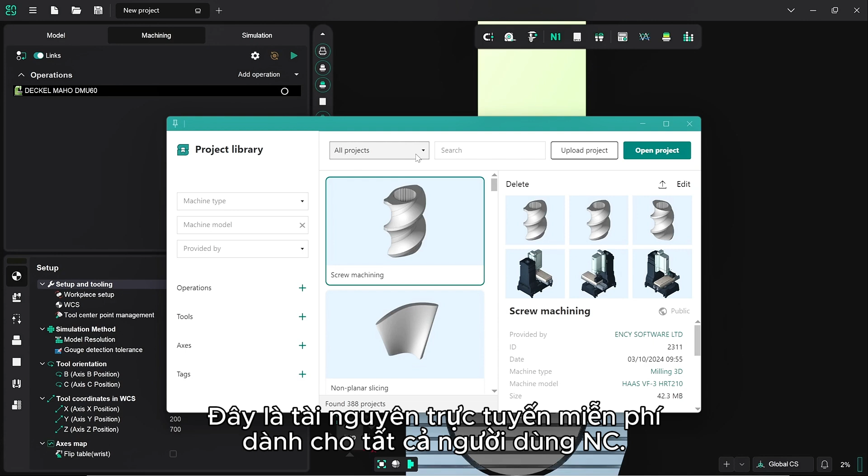So to access this, we go to the ENCY project library, which is under the open icon. We hover our mouse over it and then click on project library. This is a free online resource available to all ENCY users, and it contains nearly 400 projects which are covering a variety of different machine types and machining operations.

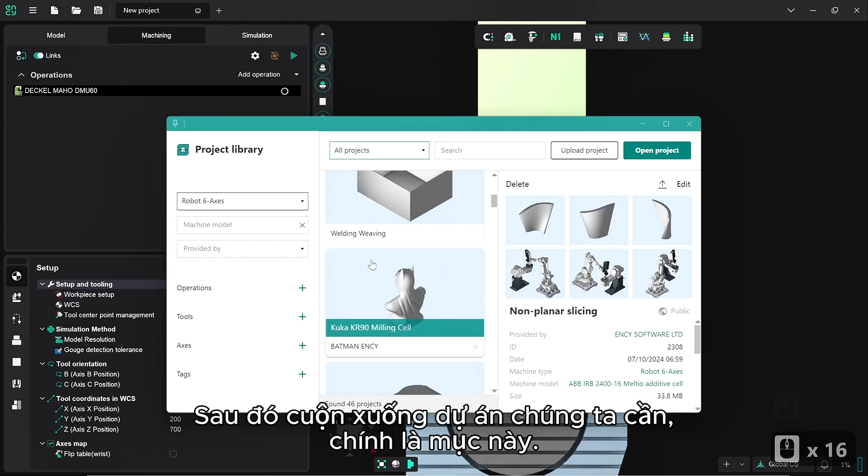However, since there's such a significant number here, we're going to close the field down slightly by clicking on machine type and choosing robot 6 axes, and then scrolling down to the project that we want, which is this one. And it lists here how it comes with a KR90 milling cell configuration as well. All of these projects will have the cell definitions or machine definitions set up for them already.

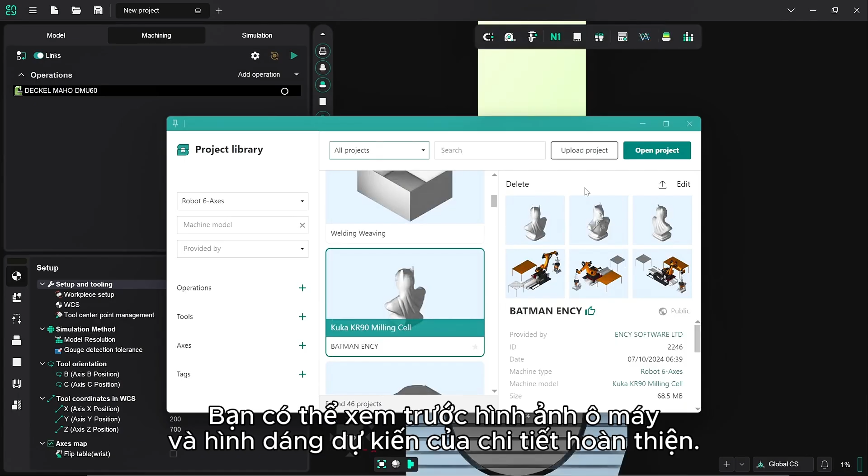So we can see here a nice preview picture of the cell and a preview picture of what the finished part is expected to look like. So we click on Open Project and it will prepare and download the file for us. Now that that's downloaded, we can close the window and we should see the project prepared for us here. So as we can see, we've got our robot definition in place.

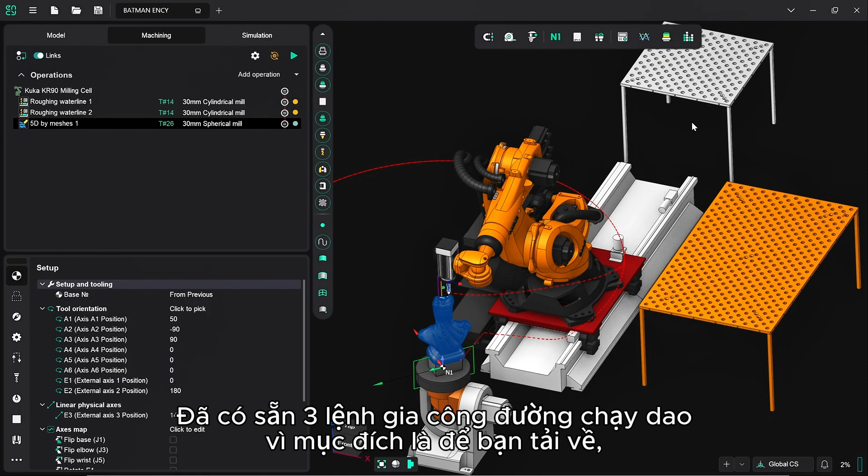There's already 3 toolpath operations set up because the whole point of these projects is for you to be able to download them, see how they're done, work through them yourself, and go through all the operation setup work that's involved as well. So we're going to delete these operations that are currently defined because obviously we want to work through them ourselves.

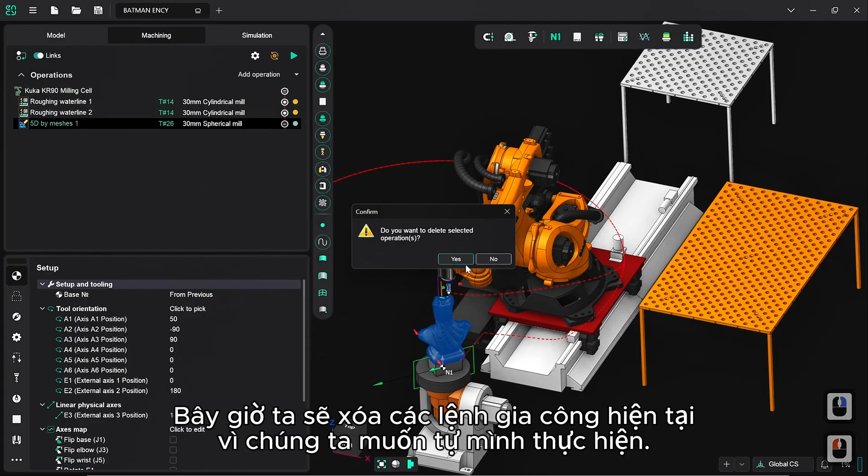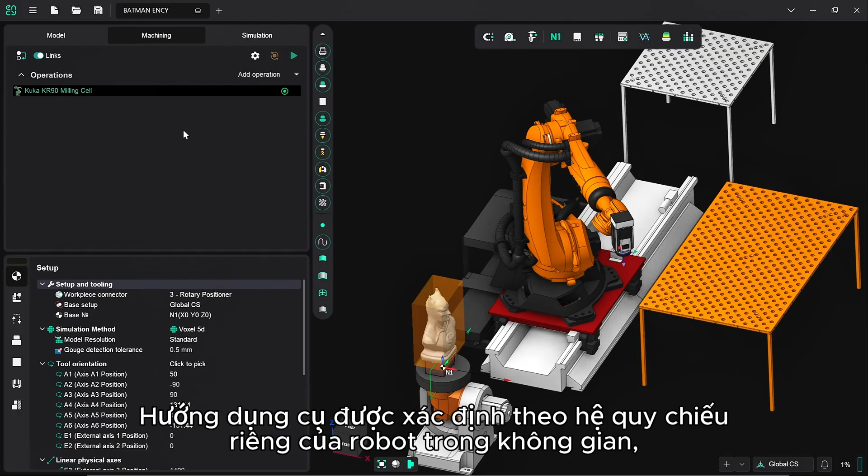So the first thing that we need to define now is the robot tool orientation, because at the moment it is facing downwards. Now the robot tool orientation is defined according to the robot's own frame of reference to where it is in the world. It doesn't pertain specifically to the workpiece that it's aiming at. So to set this, we can either double click on click to pick, or we can single click and then click on the ellipsis next to it.

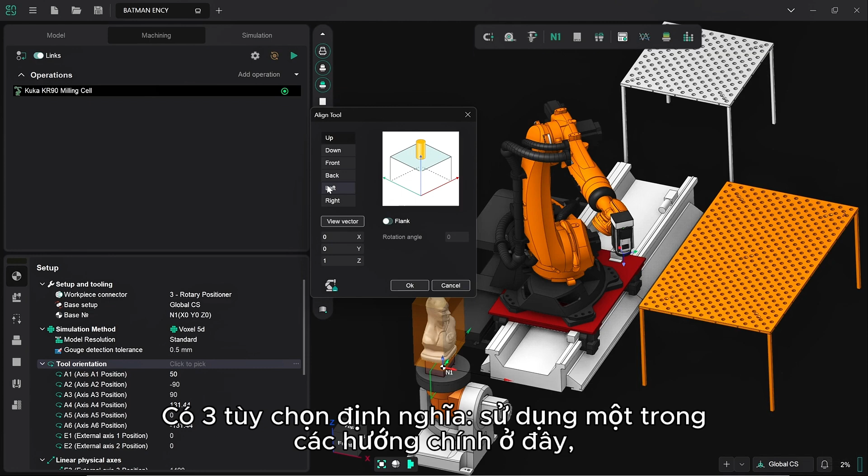And we've got 3 options for defining this. We can either use one of these cardinal directions here, or we can use view vector, which determines the vector based on the current viewport angle compared to the robot's position in space, or we can define the vector manually. So I'm going to define the vector manually.

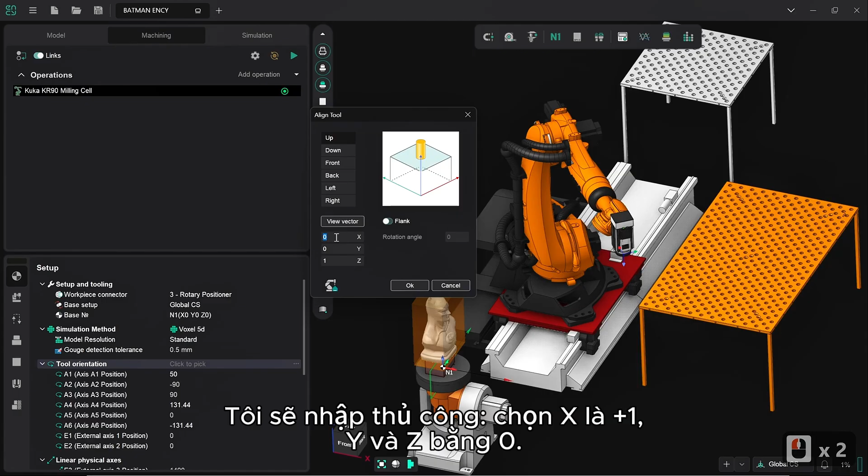I want +1 in X and 0 in Y and Z. So to do this, I'm going to enter 1 and then set Z to 0. And you can see how it's automatically set the cardinal direction to right. So we click on OK now to define that and lock that in.

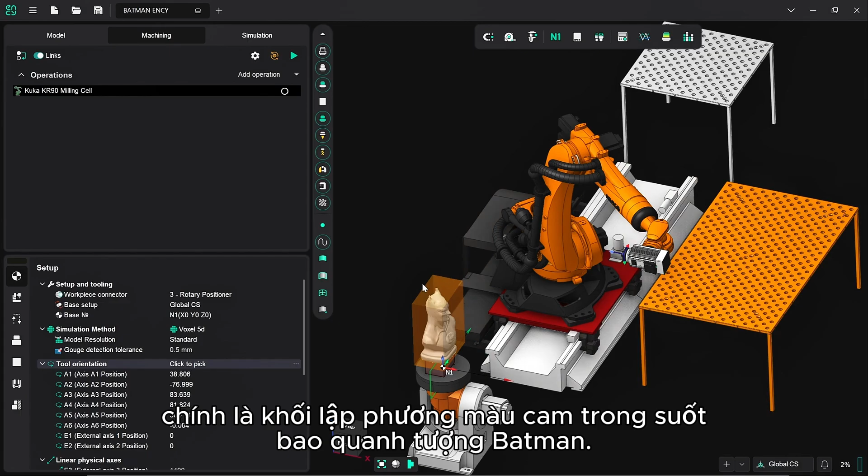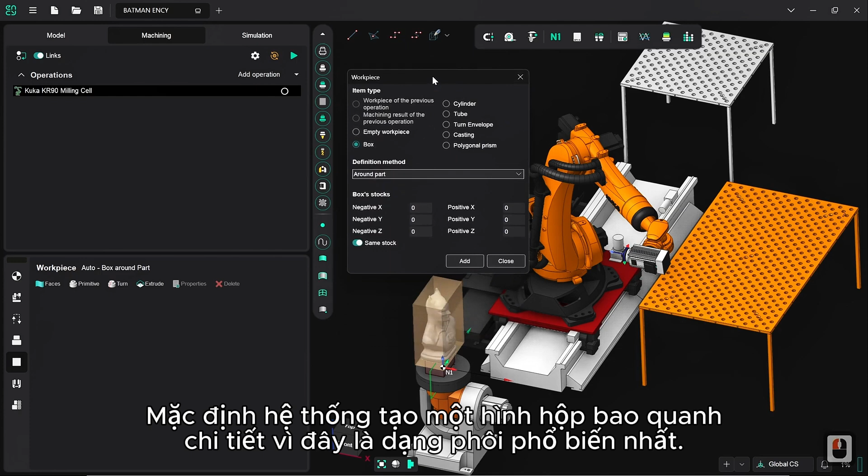The next thing we want to do before we start defining a toolpath is we want to set the workpiece, which is this translucent orange cube surrounding the Batman bust. There's already one defined, but we want to set ours ourselves. So we click on this and we delete it. Now, to define a new one, we want to click on Primitive, and by default that will set itself to a box around the part, since that's generally the most simplistic and common form of stock material.

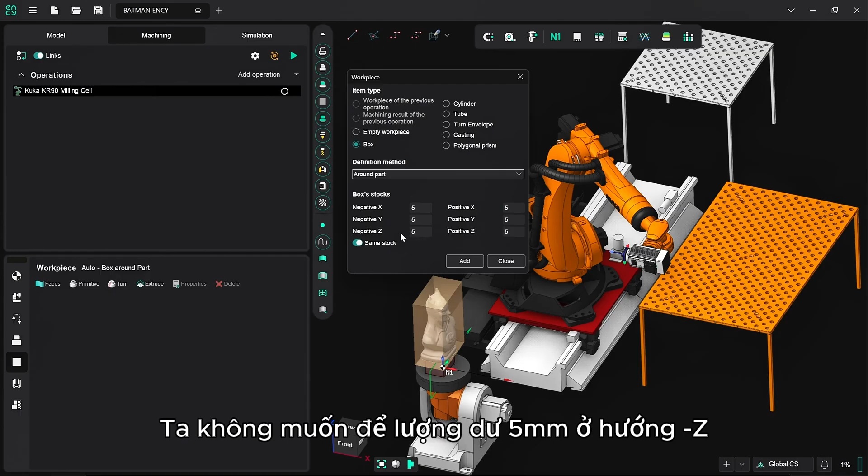We want to set this to have a 5mm offset just to make sure that there's a little bit of material to work with. So I'm going to click here and press 5, and we can see how all of these boxes are now auto-populated with the number 5. Now we don't want 5 in -Z because that will cause the machine to try and machine the underside of our statue bust, which we don't want.

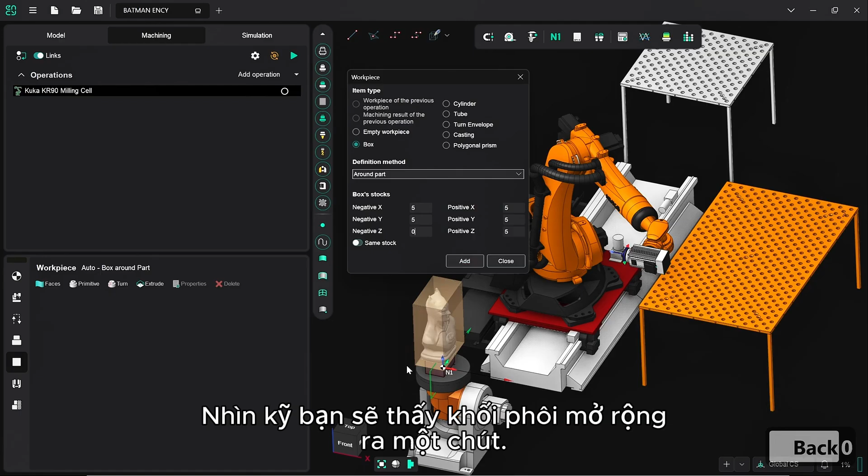So I'm going to turn off same stock, which is the setting that forced all of these to correspond the same, and then set this to 0 and then click on add. And if you watch closely, you'll see this box expand slightly as a result. There we go. Now that's the core setup done.

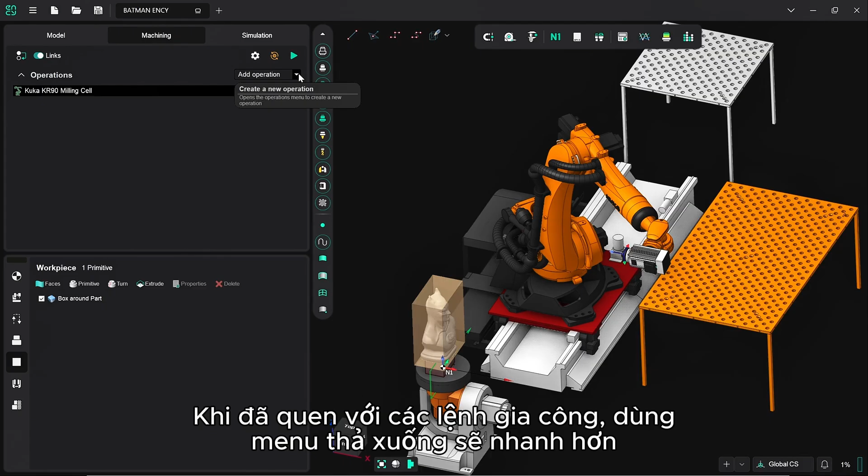So the next thing that we do now is we want to define an operation. So again, 2 ways of doing this. We can either click on Add Operation here, which will give us a pop-up box with a preview of what the operation is going to look like, or we click on the drop-down menu option here. Once you know what the various operations look like, the drop-down menu is generally a quicker way of doing it because there's no extraneous text boxes left to close. So I'm going to click on this, go to 3D Milling, and then roughing waterline.

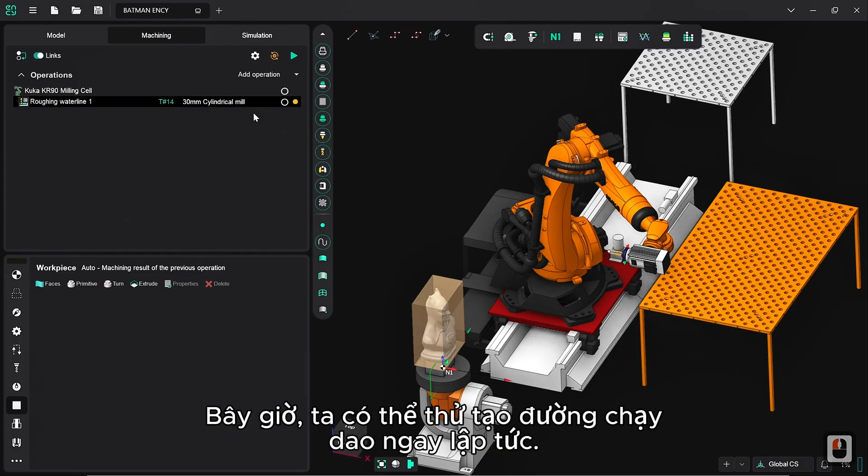Now, what we can do is we can try generating a toolpath straight away. It won't be a perfect toolpath because we've not given it any definitions and settings beyond this is the way that you're facing, this is the object that you're cutting. But it'll give us something, so it's worth a look.

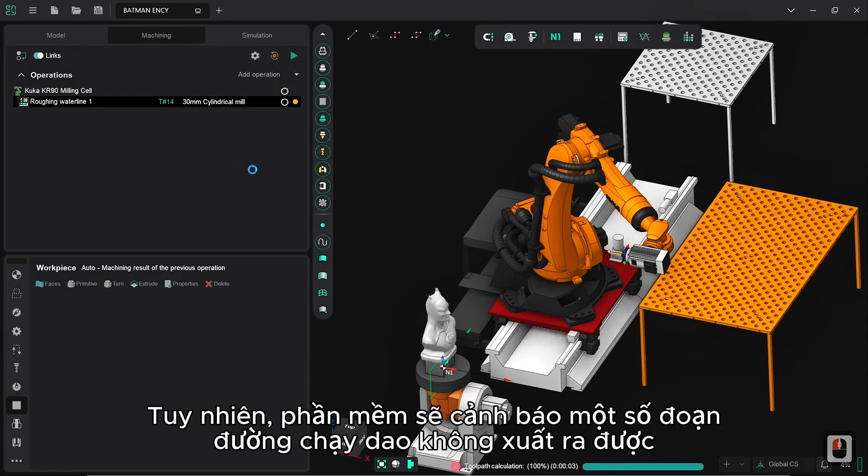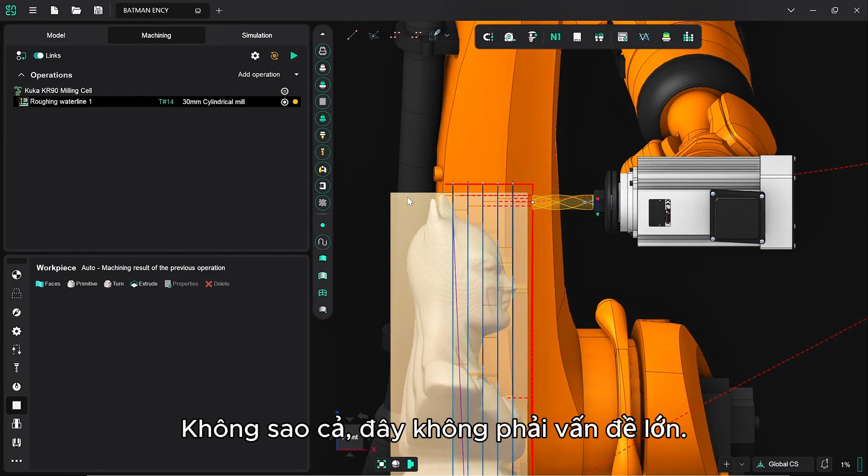So we click on Generate Now, and you'll see it generates a toolpath fairly quickly and cleanly. It does, however, complain about some segments of the toolpath not outputting due to limits of the machine tool, which basically means if we click on Front on the navigation cube here, we can see that compared to the length of the tool itself, it goes a lot deeper and outside of the available reach for the cutting tool.

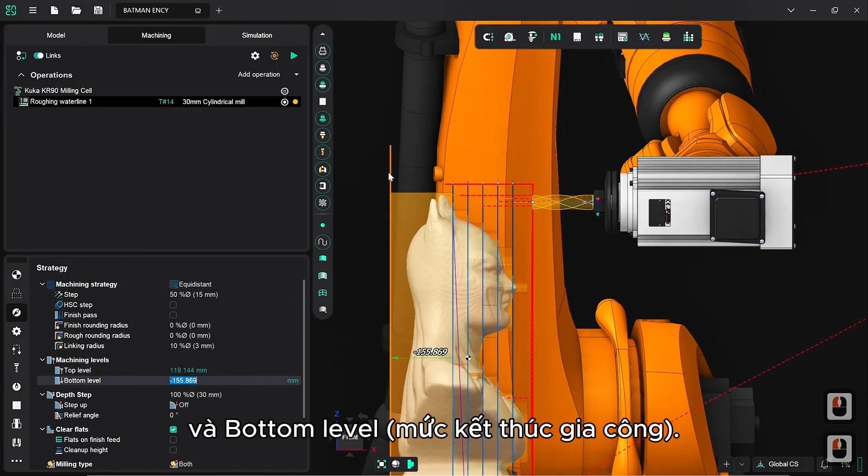This is fine, it's not a problem. We can easily define a base layer for it to stop at. So to do this, we click on Strategy, and under Machining Levels, it lists the top level, which is where it starts machining, and the bottom level, which is where it intends to finish. Now obviously this tool can't reach the far end of the block, so what we're going to do is either set a numerical value here, or drag this plane, and it is a plane, see, to a neater center point that works better for us.

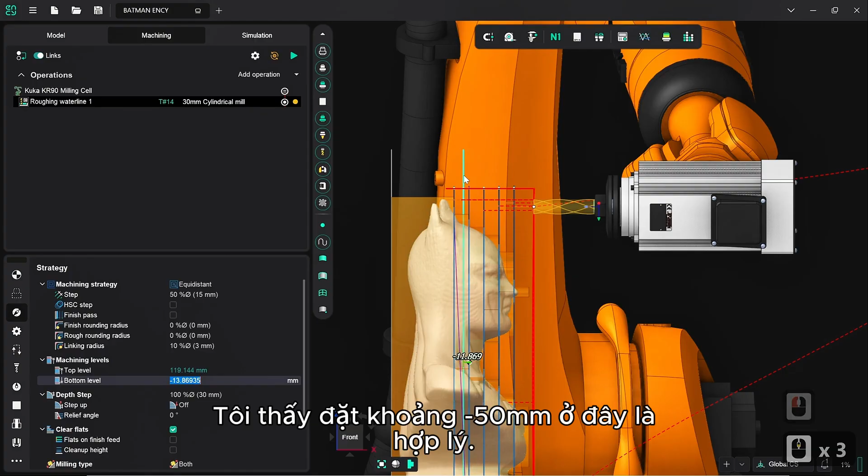So I think around -5 here looks good. Now we can see that we've still got the step down layers defined by these grey lines here, and we have 1, 2, 3, 4 and a bit, which is not really ideal. It's not the most elegant solution.

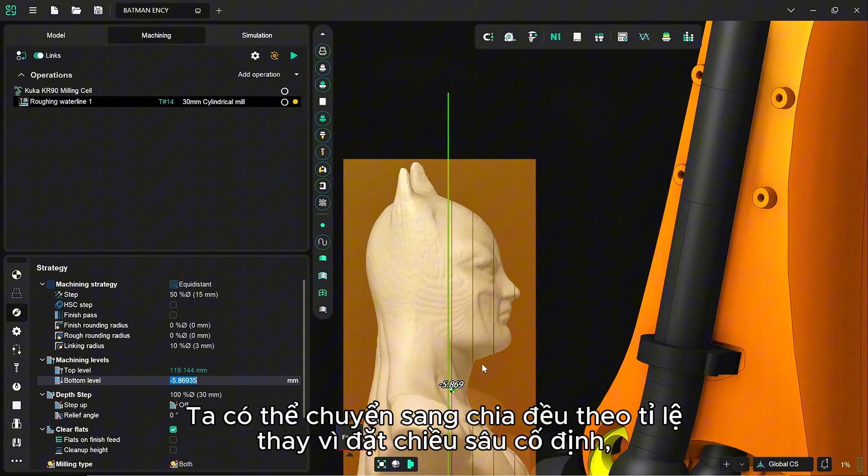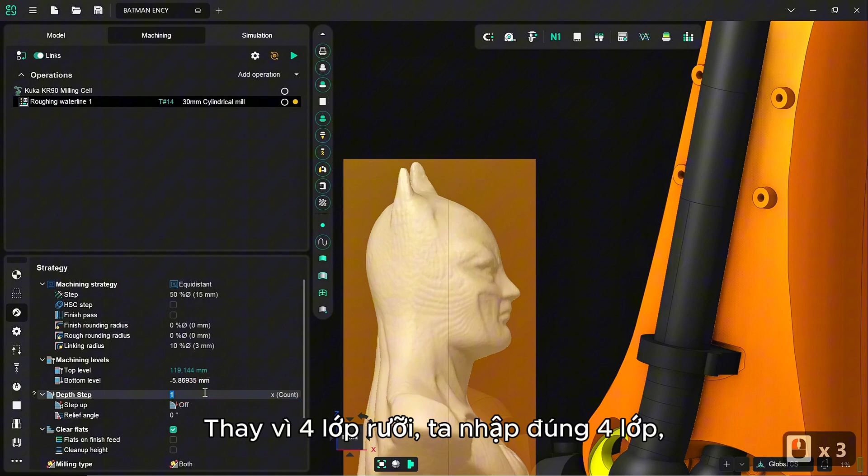So we can set that to be proportionally determined instead of being to a fixed depth, because at the moment the depth step is set by the size of the tool and it's set to 30mm absolute. So what we can do here is click on this, and over on the right there's a little drop down tab, and we can set it to count. So instead of the 4 and a bit that we had, we can set it to 4, and that means each depth step will be somewhere in the region of 31 or 32mm.

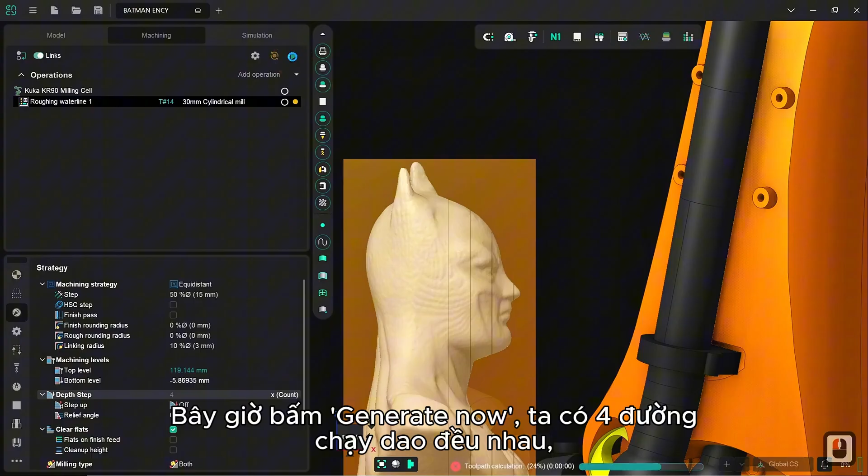So we do that, and we can see now how it's neatly defined these 4 lines right down to the point that we set with the green plane. So I'm going to click Generate Now, and we'll be able to see that we've got 4 nice neat toolpaths, all of the same depth, not constrained by the tool size as such, although well within the tool's reach.

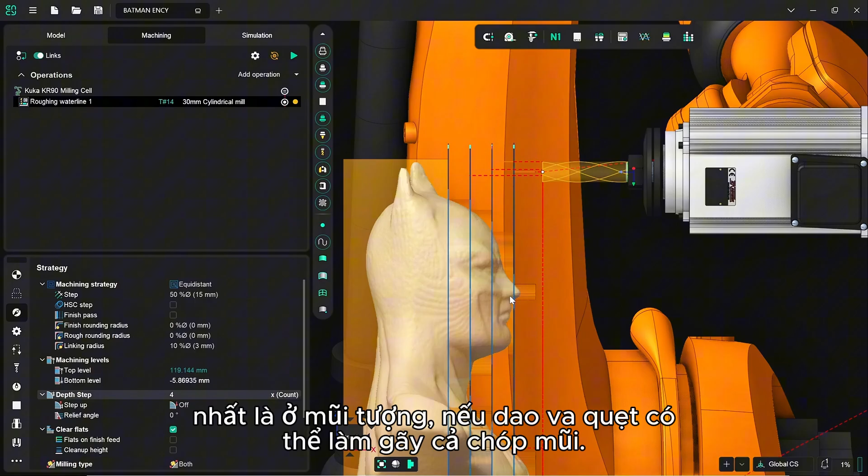The next thing that I'd like to change is these steps. They're a bit aggressive, and especially this one in particular is likely to cause us problems. If the tool accidentally clips it, it'll take off the entire tip of the nose. So we've got a nice interpolation tool built into ENCY called Step Up, which allows us to define a set of sublayers, which are contour passes, which will smooth out that step into something closer to a curve.

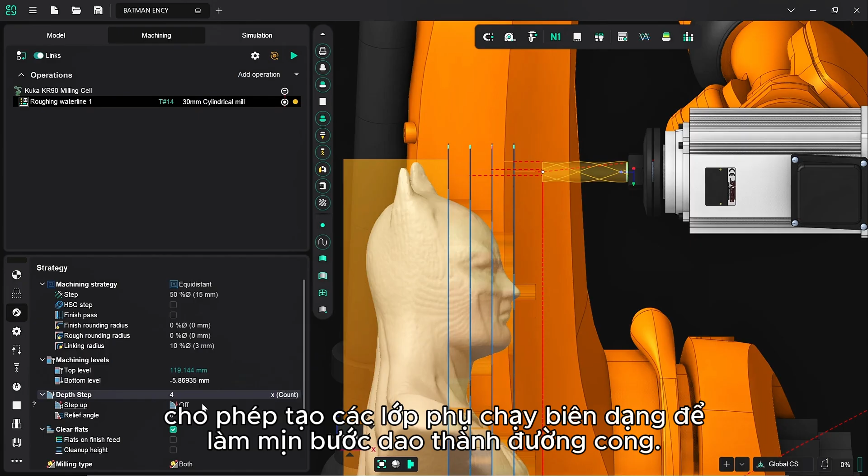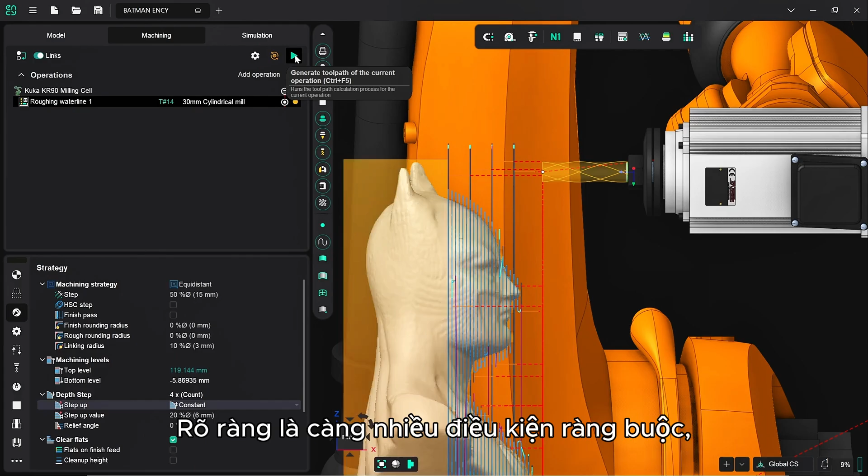So to define Step Up, we click on the Step Up entry, click on the down arrow, and then click Constant. Now, if we regenerate the toolpath, we'll see the difference. Notice how with each setting that we're defining, the toolpath generation takes very slightly longer. Obviously, the more constraints that we set, the more calculation that the software's got to do for how to get the robot to achieve the end result.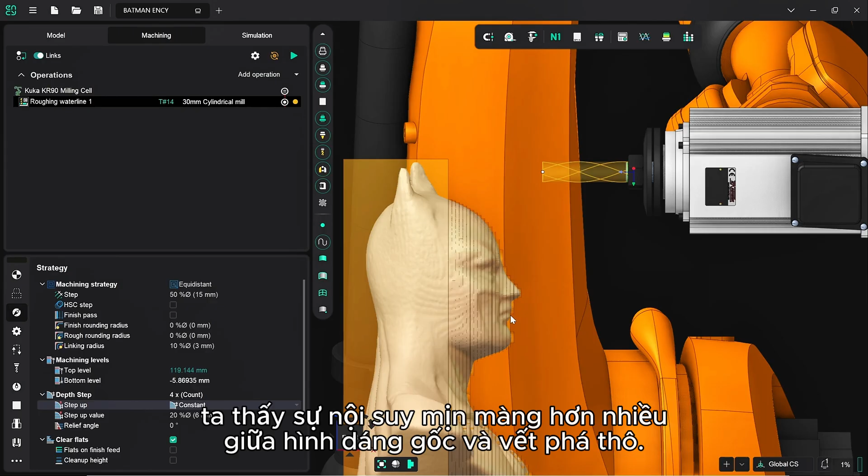Now we can see we've got these smaller subpaths going on between each of the primary step-down paths. And if we turn off toolpath visibility, we can see how we've got much smoother interpolation between the final shape and the roughing pass. This is good so far.

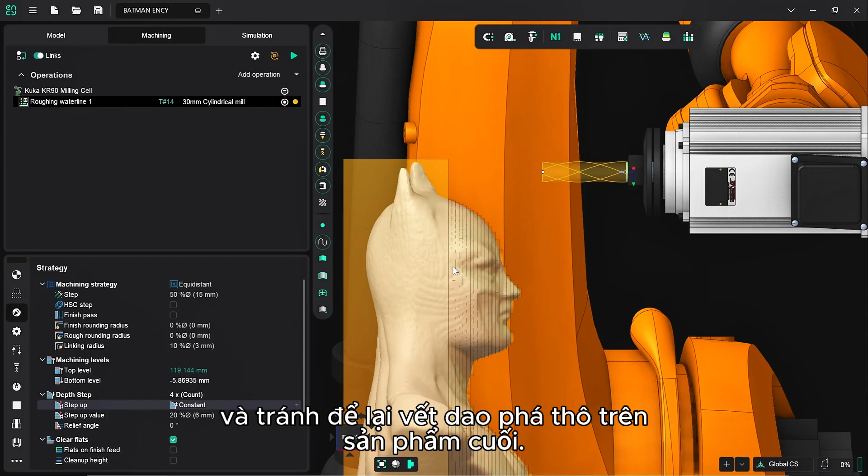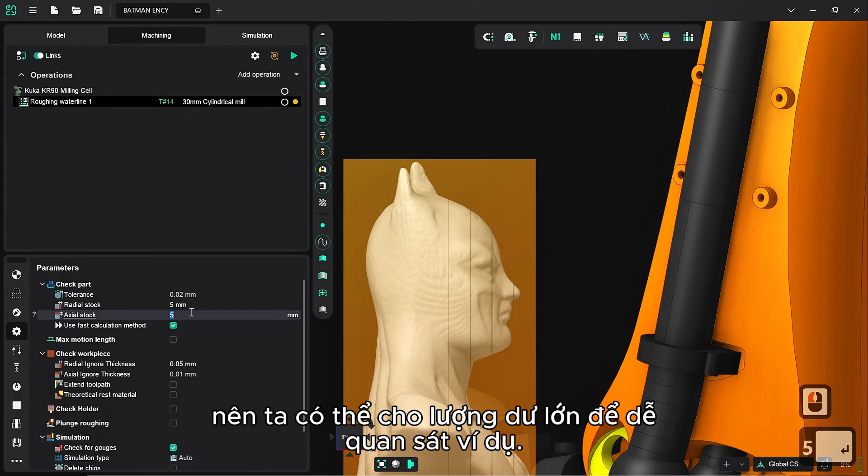The next thing that I've noticed is just how close it is to the actual final model. Because this is a roughing pass, we want to give it a little bit of extra meat to work with, so the finishing pass has got something to do and there's no roughing tool marks in the final piece. So the way to do this is we go to the Parameters tab, and in axial and radial stock we want to set that to a higher value than 0. So I'm going to set it to 5 in both of them, because I'm assuming that this is to be machined out of a soft material like foam. We can give it a nice amount of excess, and it makes it very clear for the sake of example.

So if we regenerate the toolpath once more, we'll see that there'll be an offset now. Give it a second to generate.

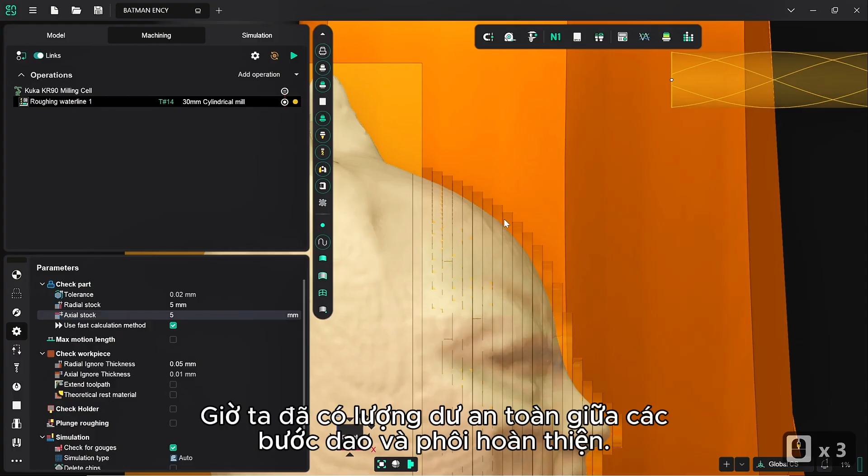There we go. So we've now got that nice offset between the stepped path and the final workpiece.

So the next thing we need to do is simulate this, because this is a very nice background simulation that gives us a clear indication of what we're expecting the final piece to look like.

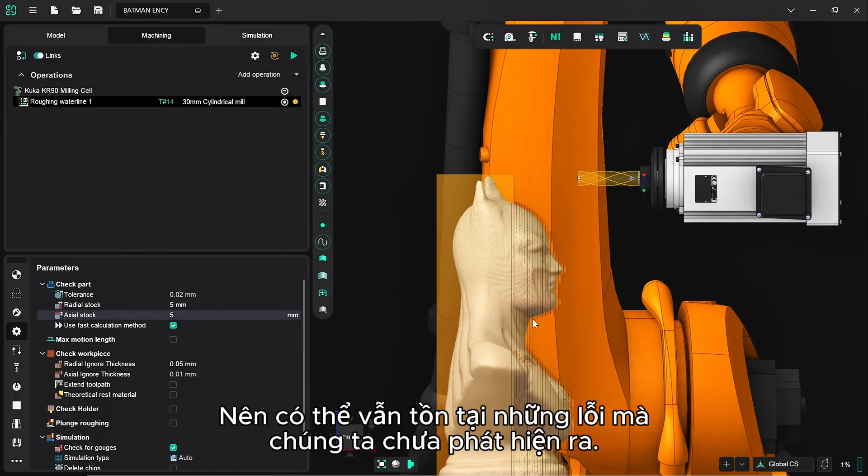But it doesn't calculate every aspect of the toolpathing, and there may be errors we haven't caught yet. So the way to do this is we go into the simulation environment and choose a viewpoint that we're happy with to see what's going on with the machine.

And now I'm going to slow down the machine speed slightly. That's what this scroll bar here does - it slows down the movement speed of the simulation.

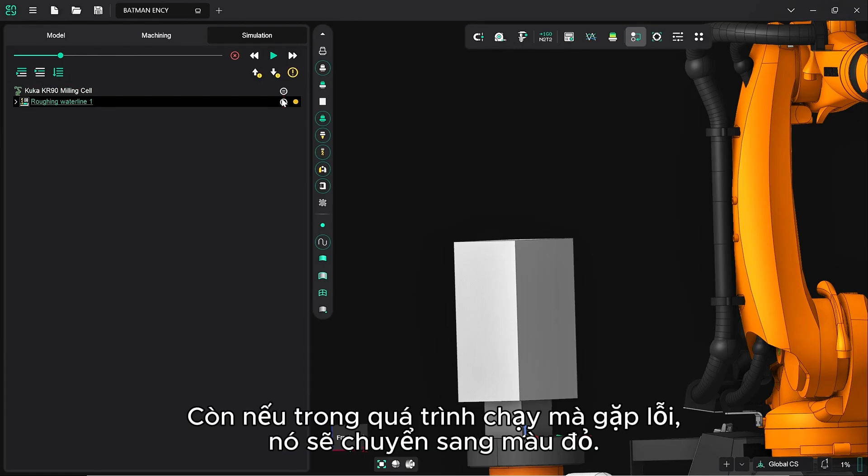There's something I want you to take note of before I click run, and that's this node status here. We can see at the moment these are white. This means it's an unproven toolpath. Once it's been run and the results are known good, they'll turn green. Once it's run and runs into an error, that will turn red.

So it's a very, very easy top-level view to determine whether or not all of your toolpathing is correct and working.

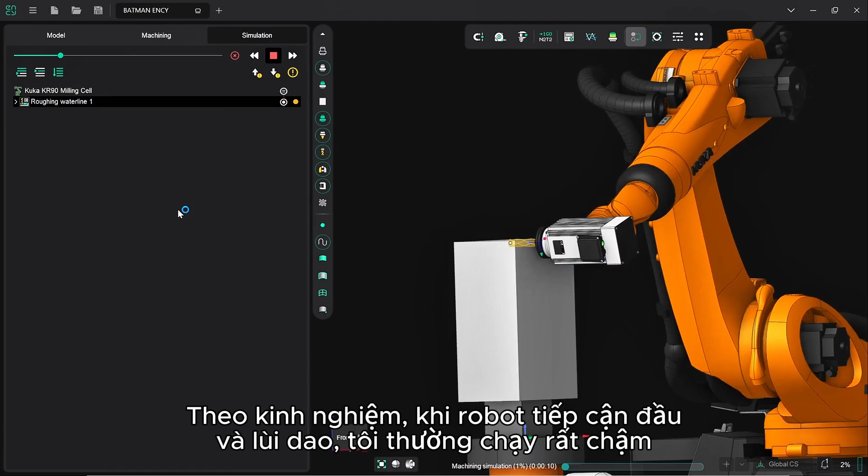So now I'm going to click run, and we should see the robot start to move. Generally, as good practice, when dealing with the initial approach and return, I tend to run it very slowly because it means we can see if there's going to be any crashes we're not expecting. Once the machine is actually engaged with the workpiece, we can speed it up a bit.

We'll still be able to catch errors as they happen, because anywhere that causes a problem will usually flash red. Plus, at the end of the toolpath, we'll see highlighted errors in the overall toolpath definition, which we'll possibly see in a minute.

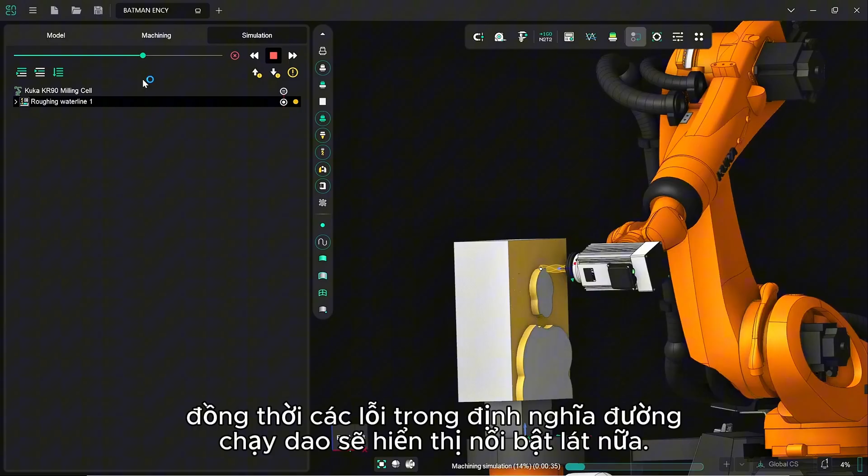So I'm going to speed this up a little bit. But before I do, we're going to see these tiny little interpolated toolpaths I was talking about. Notice how these are just individual contours as opposed to a whole new step-down layer. It's a much more time-efficient way of achieving the result we're after.

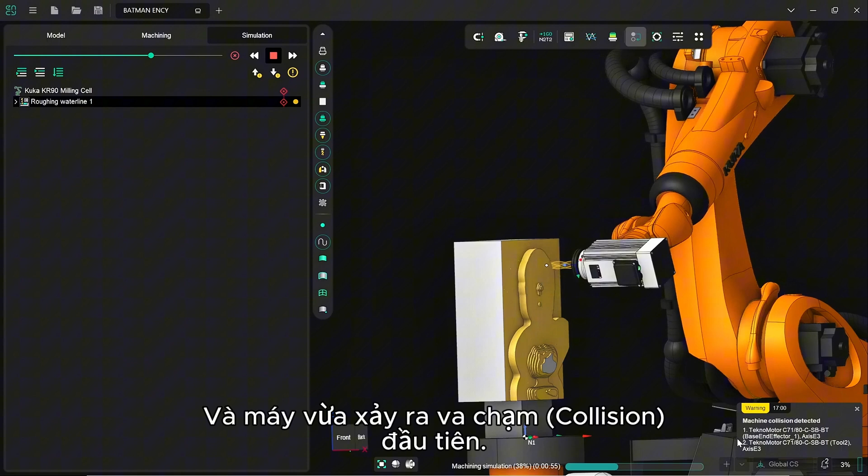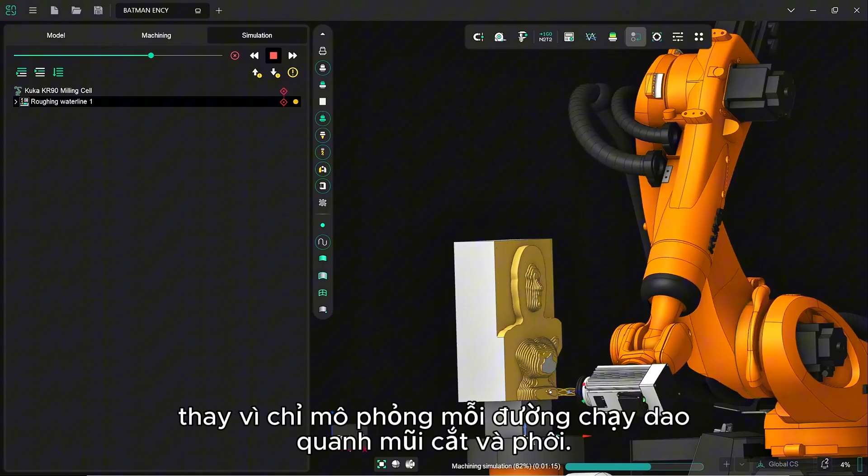And we've just had our first machine collision. It's telling us the motor hit the turntable, which is obviously something we cannot have happen in real life. One of the great strengths of ENCY is that it simulates the whole machine kinematic set as opposed to just the toolpath surrounding the cutting bit and the workpiece.

So it allows us to catch errors like this with much more complicated machining setups like this multi-axis robot system. So we now know there's an error and a problem we need to resolve. For the moment, I'm going to let it finish, and then we're going to go back into the machining workspace and see where the issue has come into play.

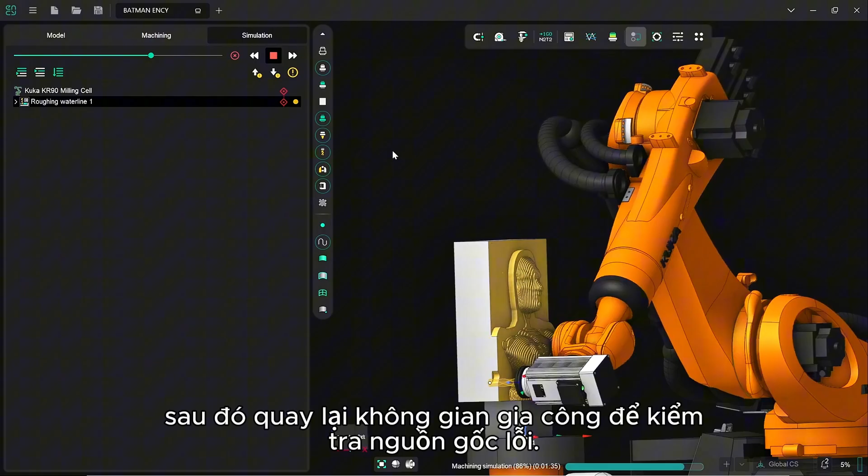There we go, again, it flashes bright red when that happens. It's a nice easy visual cue to see that something's amiss.

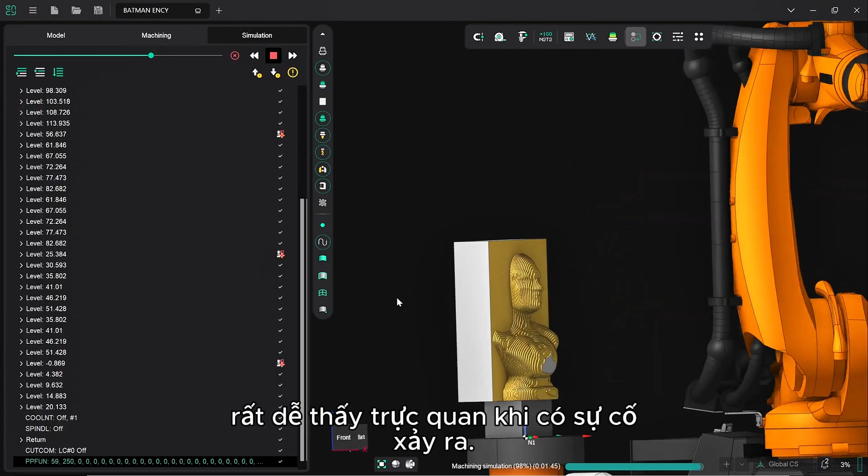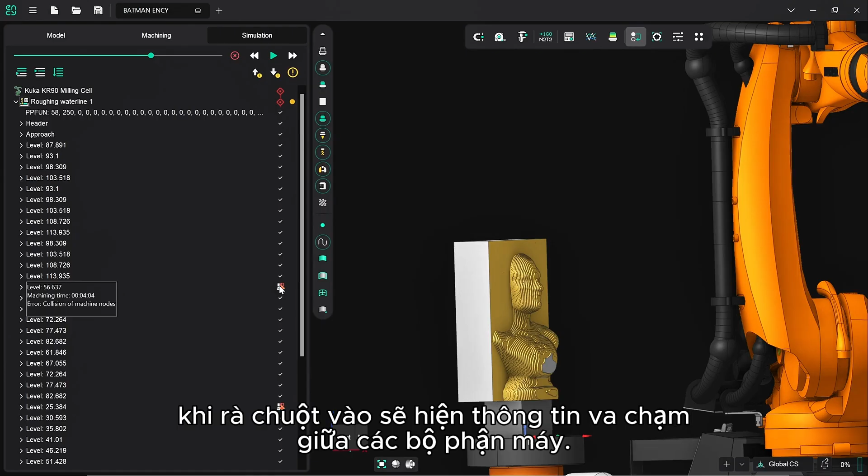And this is showing what's going on in each of the toolpath definitions. So here we can see at level 56.637, which is very descriptively named, there's an issue where, if we hover over it, we've got the collision of machine nodes. So as I say, the actual spindle head hit the turntable.

This is easily resolved though. So if we turn on toolpath visibility again, we should be able to see that. And right here we've got these purple lines. These purple lines indicate links and leads between toolpaths. Links and leads are transition moves made between cutting paths.

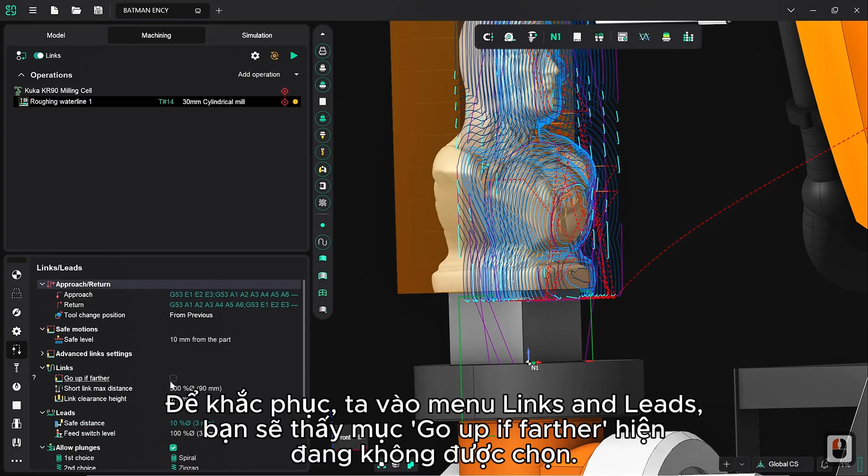So to resolve this, we go to the links and leads menu, and we can see that the 'go up if farther' option is not checked. Now what this means is if there's a link between cutting paths that exceeds the length defined in the go up if farther setting, then instead of following that previous link, it will pull the tool away, move up to the safe plane, and then reapproach for the cutting path.

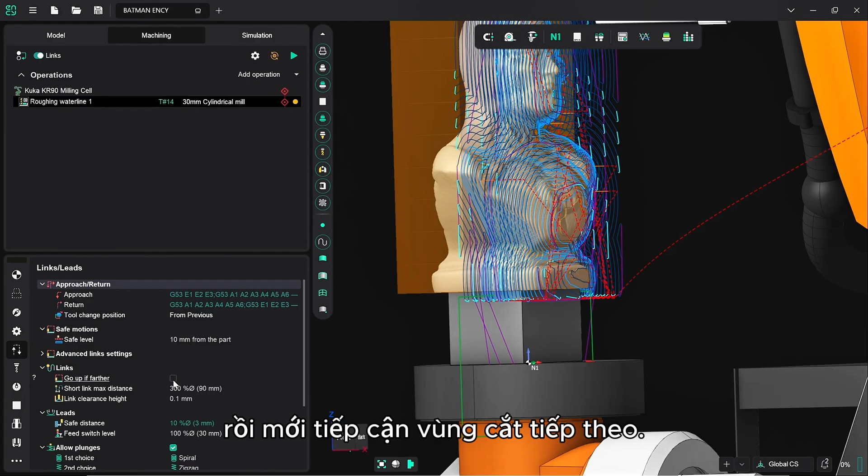So if I turn this on now, we can see that 500 millimeters is the setting, so half a meter. It's not a small distance in this regard, but it should be sufficient.

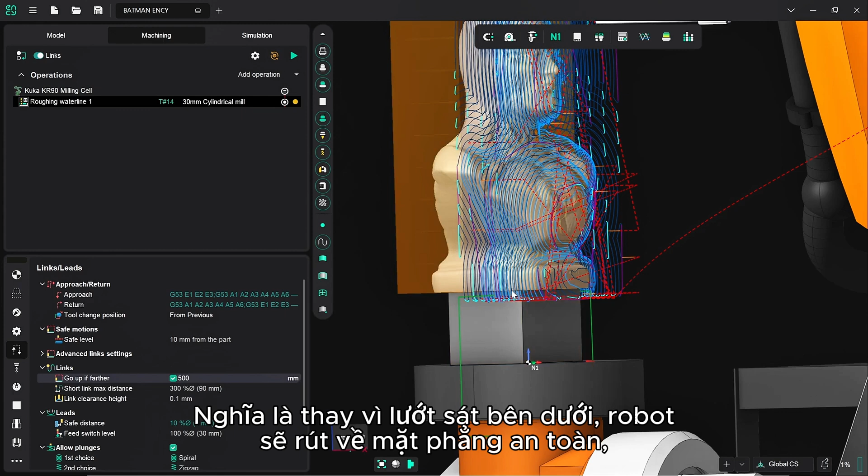So if I now regenerate the toolpath operation, we'll see that these links down here have disappeared. This means each time it was going to pass down here instead, the robot returns to the safe plane and then moves to where it needs to go and then comes back in instead. This is much, much safer generally.

Now, there are a couple of other definitions that need setting as well. The first is I would like to set the checking of the tool and spindle holder.

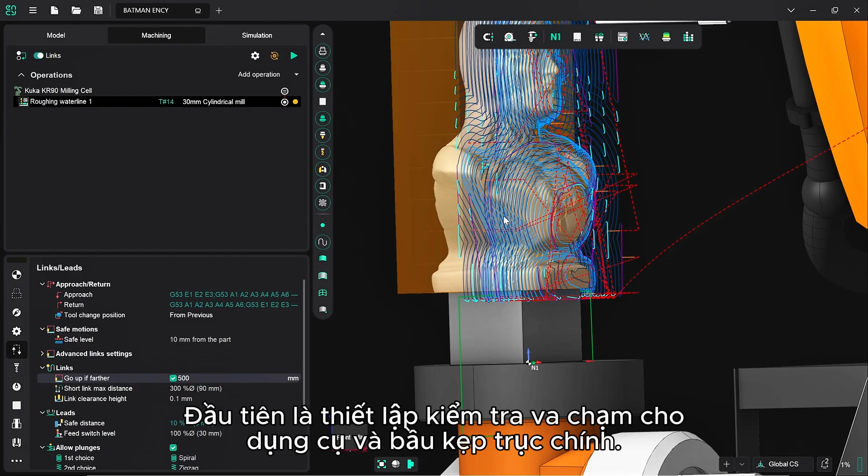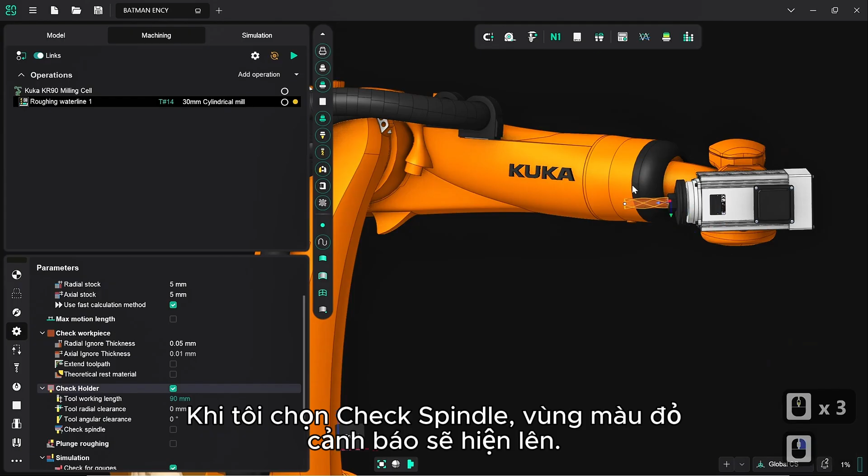The easiest way to do this is if we go to parameters, and we then look at check holder. This will make a point of allowing us to define safe zones around the tool, holder, and spindle. So if I click on check spindle now, you'll see that this red highlighting has come up. This now tells ENCY that the robot is not to move in a manner that causes this red exclusion zone to intersect with the workpiece at any point.

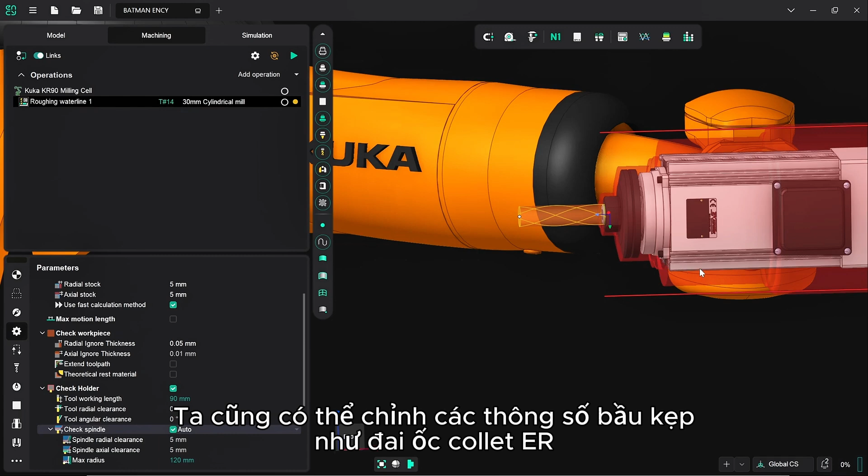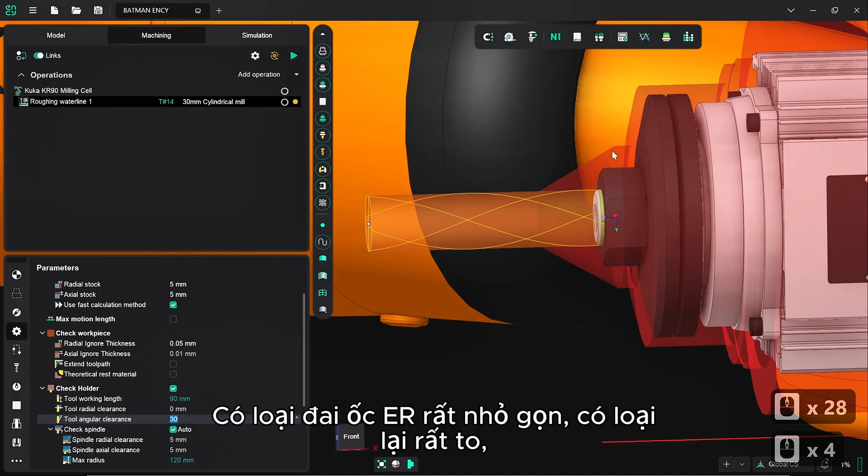We can also adjust for things like tool holders, such as collet nuts, by changing the tool angular clearance. If I were to increase this by, say, 30 degrees, you can see that cone expanding around the tool now. This is very useful, especially in the case of collets, which aren't always the same shape. Some of the nuts are very low profile, some are much bigger, and this gives you a little bit of extra exclusion area to make sure what you're doing is absolutely safe, because the last thing we want to achieve is breaking a tool unnecessarily.

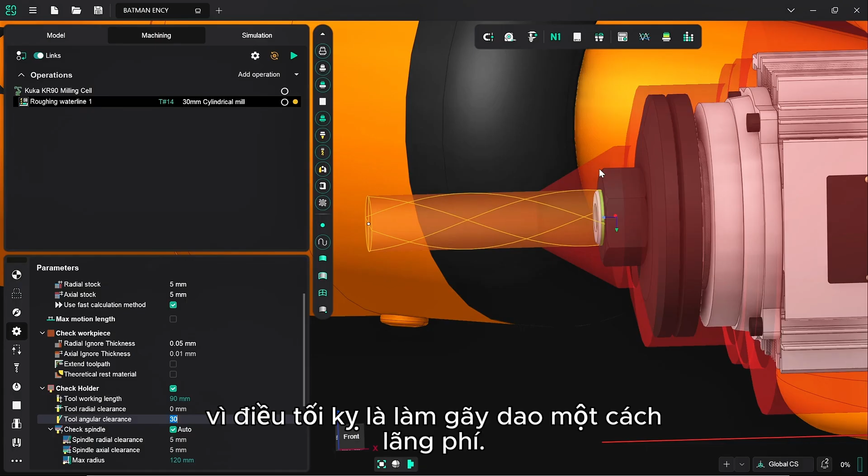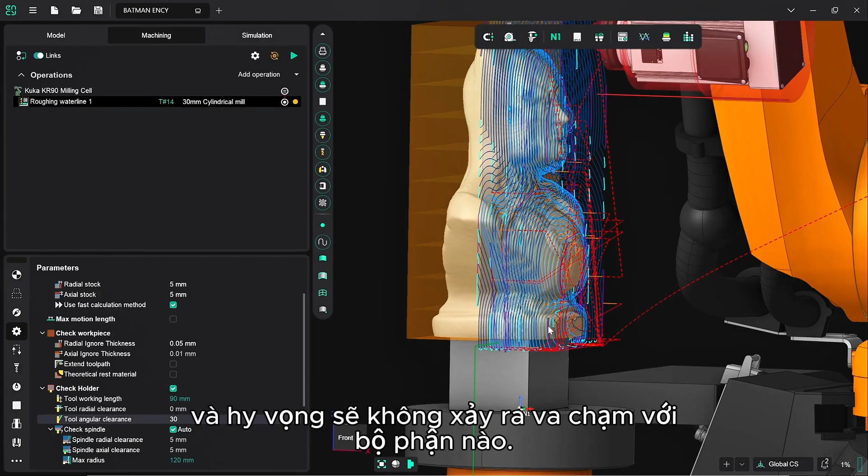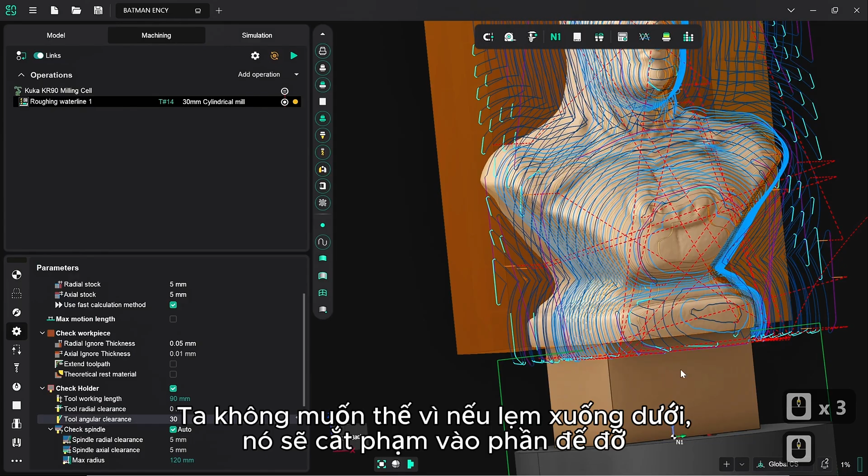So we're going to zoom back out now, and click on Generate Toolpath again. And we now have a nicely defined toolpath with no long links going down there, hopefully with no intersections with anything. However, there is one more minor problem I'd like to address, and that's the amount of roll-off down at the bottom here, where the toolpathing effectively goes underneath the bust almost. We don't want it to do that, because as soon as it starts going underneath the bust, it can affect this plinth that the bust is actually stood on. And we can't have that, because that's holding the bust in place on the turntable.

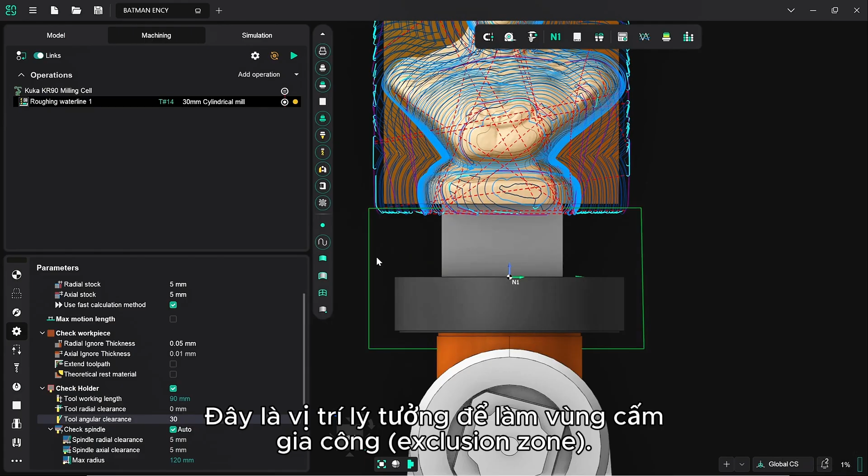So what we can do to combat this is, if we go into the relevant view, which in this case is back, we can see there's this nicely defined green polygon here. Now, this is the perfect candidate for an exclusion zone. And if you can't select this at the moment, turn on Select Curves in the selection menu here.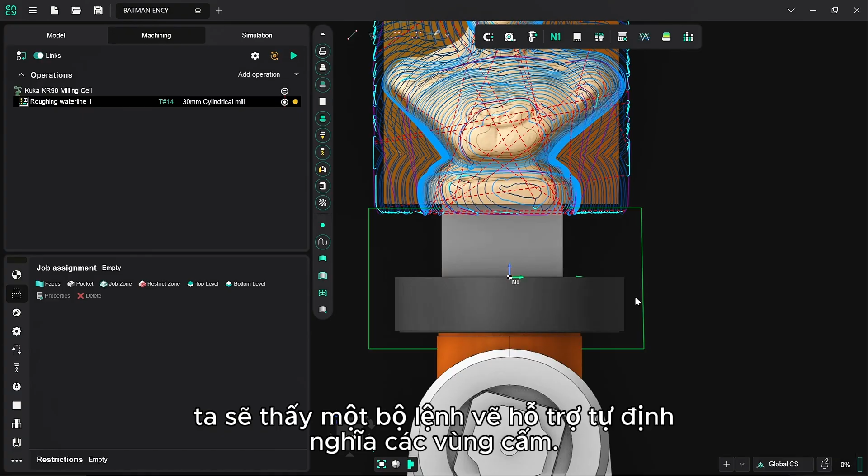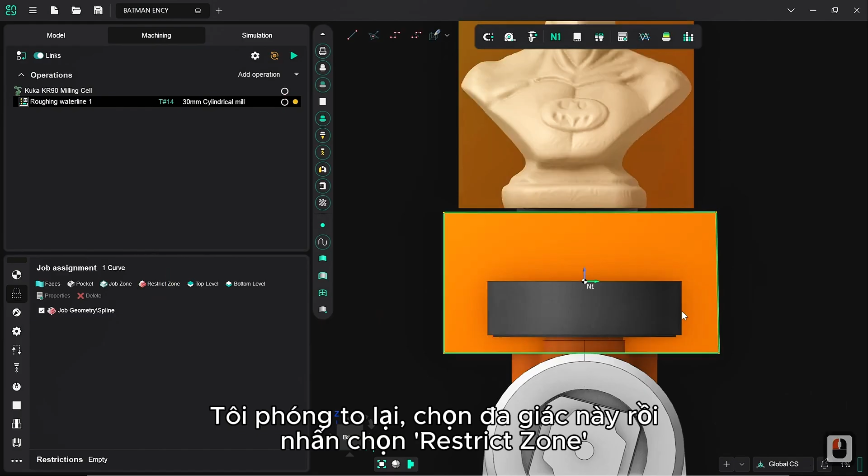To make use of this as an exclusion zone, we go over to the Job Assignment tab. We highlight this, and something worth noting for future - before I get too far into this, if we scroll out, we can see there's a set of drawing commands available to define our own exclusion zones. Since there's one already here, I'm going to make use of it. So I zoom back in, click on this polygon to select it, and then click on Restrict Zone. And that defines a nice clear boundary area that the robot can't go into.

So we now generate the toolpath one more time, and we should see a nice neat cutoff around here where the tool descends no further. There we go. So we now have a very nicely defined roughing path, I think.

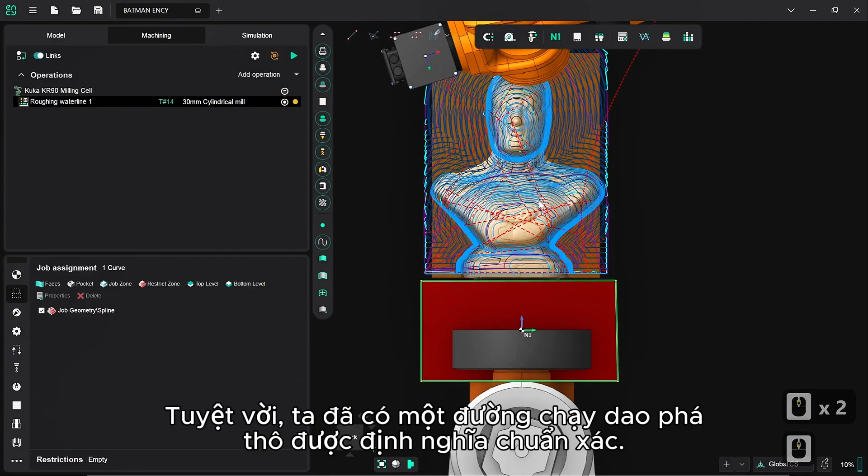So I'm going to go into the Simulation tab now. I'm going to reset the simulation workpiece, so that goes back to being a basic grey block that's unmachined. Pan around a little bit so we can see it more closely. And then I'm going to click on Run.

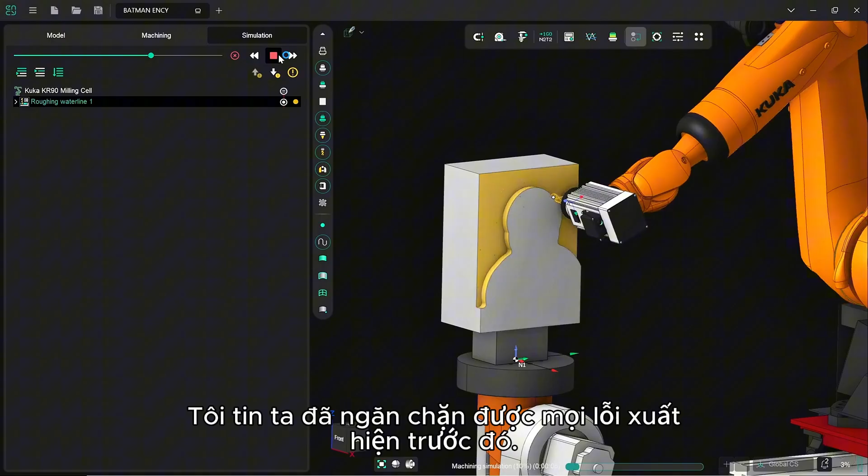Now, I'm not too worried about the speed of the approach in this instance, because I know that the approach is fine. I'm going to leave it running at this speed so we can see if there are any issues that we need to catch. I believe we've forestalled all of the issues that were previously coming up. We've got a nice clean cut down at the bottom, so we haven't lost anything from there. We've got the nice interpolation we were talking about before as well. So we've got a very, very smooth, very nicely roughed out bust so far.

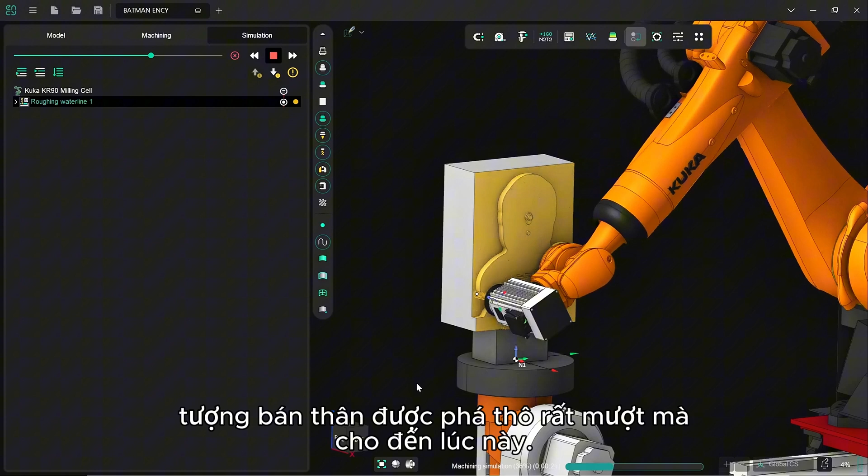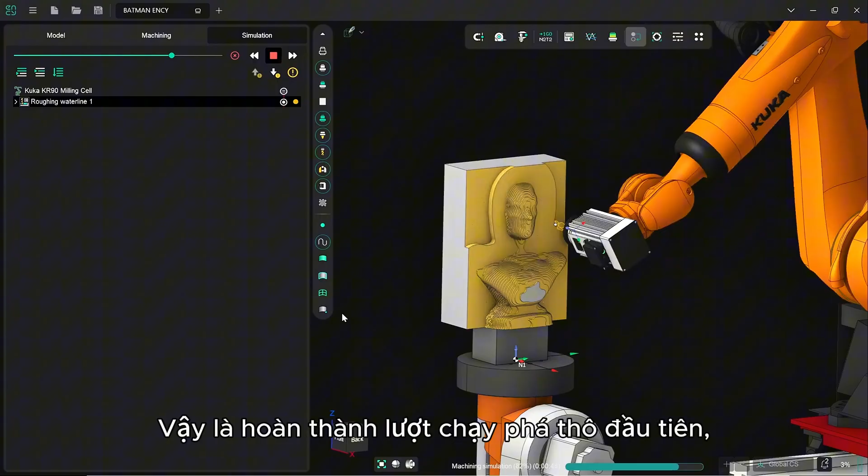I'm going to speed this up a little bit, because otherwise we're going to be here all day. You'll notice we've not had any errors manifest so far about machine intersections or tool intersections or anything like that, because of all of the exclusion data we've given it, especially the check spindle data as well. And there we have it. We have the first pass of our roughing, and you can see the node is now a nice green status, which tells us it's good to use.

So in the next video, we're going to cover the second roughing process, and then in the final video, we'll cover the full finishing process as well. See you then.